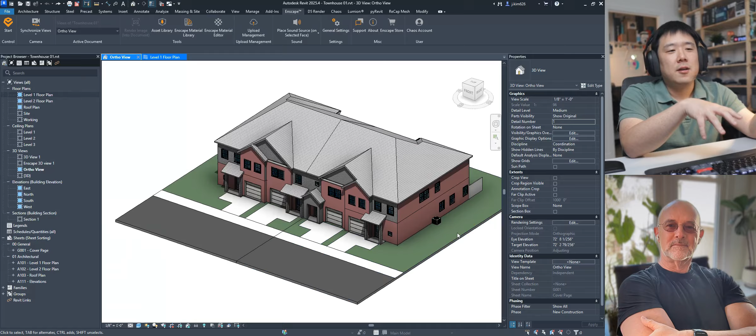What else is your plugin automating? Well, at a basic level, it's automating only the download and import part. So method one is basically bringing things in at a project level. And we have created this add-in on the Revit side. What's it called? Well, I guess 3D Warehouse Importer. There you go. 3D Warehouse Importer, it will come in as an icon inside of the add-in ribbon on the Revit side, and it gives you a single button. It just opens up a dialog.

Let me make this a little bit smaller so you can see. So it's just opening in context. So instead of going here and going there, you're opening in context. Normally you could obviously go onto your browser and log into the 3D Warehouse. For those of you who do not know, 3D Warehouse is a vast library on the SketchUp side, user contributed, and also company and SketchUp themselves contributed, of different types of assets. You can find it all here. Yes, you're going to find the right ones, but you will also find the wrong ones too. But obviously you can sort things out, but these are on the SketchUp side where visualization has more focus.

And I have been utilizing this library for a long time. It is freely available. I believe, as somebody who has an account, you have a limited amount of assets that you can download. But chances are that your office has some SketchUp license, which will allow you to download as many as you want. So I wanted this environment to be inside of Revit rather than you going onto your own browser. Yes, you can absolutely do that and search up the assets you want, but the reason I wanted this inside of Revit is because I wanted Revit and this add-in to control the download and the import part automatically.

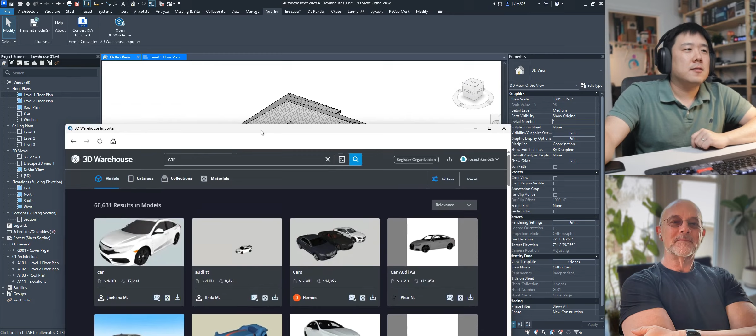So this one will keep you logged in. As you can see, as I just opened it up, it had me logged in. That was the number one thing. I did not want to log in every single time I open up this add-in. Essentially it is a browser. You can search up something. So here I'm going to look for a car, because I'm going to try to find something to sprinkle around the building, trees, cars, and context buildings, those types of things you might look for immediately when it comes to project-level asset placement.

So here I'm going to perhaps download this car here. Some top tips: when you're looking for these types of things, you want to look for cars that are not high in terms of storage. So here is 500 kilobytes, whereas this is 9 megabytes. You probably don't want too many assets that just explode your model size.

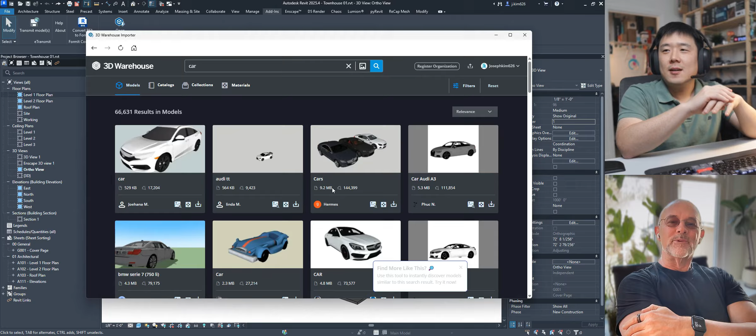So you want to be a little bit mindful of what kind of things that you bring in, but obviously you don't want to bring in like a toy car or something that is not really suitable for your scene.

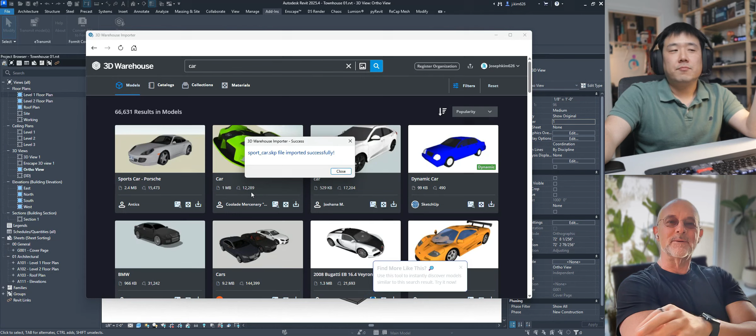Obviously I haven't done this search at the time, because you can choose from popularity. So I can go ahead and bring this Porsche, sports car, and just click on download. And here you'll simply do a SketchUp file, which is the format that you want, a SketchUp file. And this is what this is built for.

Obviously, if you are on your separate browser, you can bring it in as whatever the file format and you can save it wherever you want. But you're going to have to archive it on your preference and then on your folder separately. But I wanted to kind of remove that process, because coming up with the correct file name and correct file location all the time, and keeping up with this plethora of different types of assets coming from all different places, is quite a difficult task.

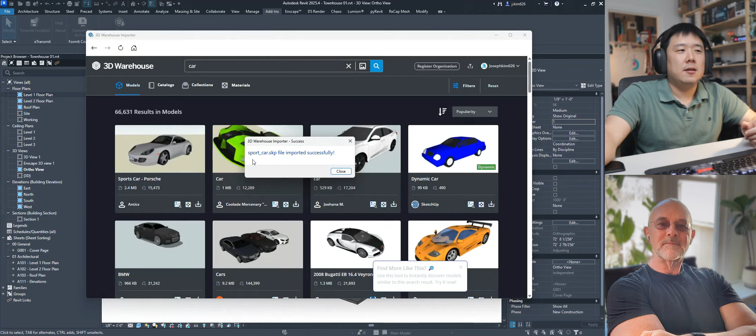So you click download and then it will internally download it and import all of that automatically for you. So here it'll prompt you: sport_car.skp, which is a SketchUp file name, imported successfully. Keep a note of this file name just in case you need to refer back later. Close, and then I can either minimize or close out. And it is in here.

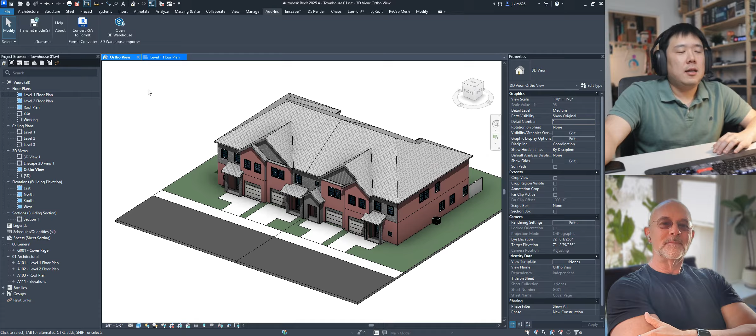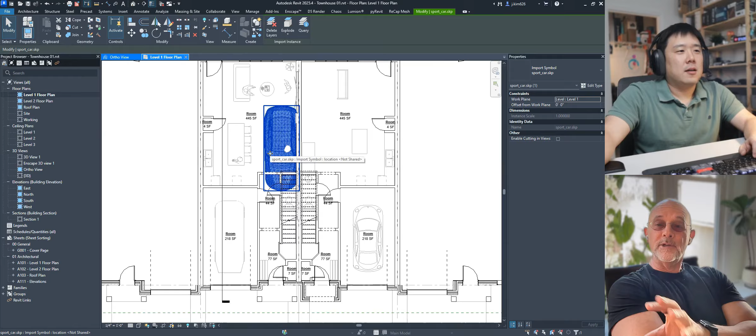Now, the first task is to look for it. How do I look for it? Usually it comes into the project base point. So my car is actually in there. You can see that there is a triangular mesh in that corner. So you can tab and eventually get to that thing, or I can also go to the floor plan and hunt my car down. It's typically placed very close to the origin of the project.

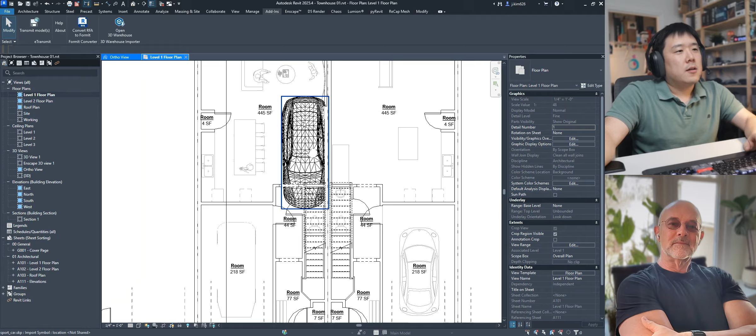Under the hood, what's happening is that it's utilizing the 0,0,0 absolute zero point on the SketchUp side and matching it with Revit's zero origin. So that's where it has come in, because you can see my project Revit origin is right there. So you just grab that, drag it out and park it in my driveway, and that car is just going to come in like that.

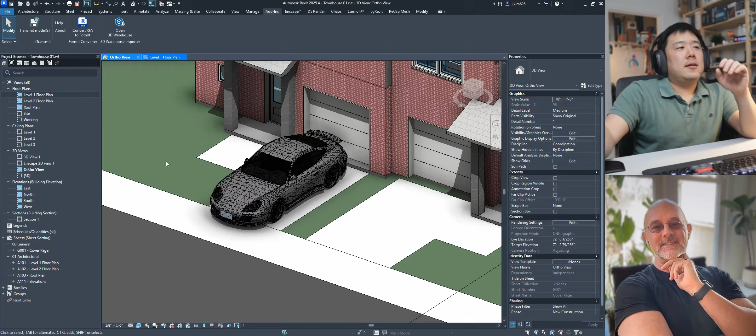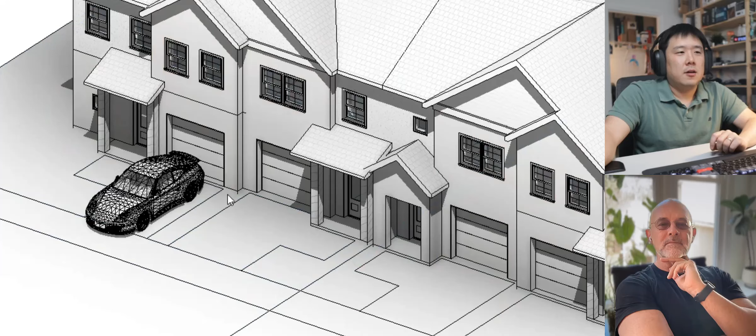And I wanted to demonstrate this. It is a triangular mesh, or triangular mess rather, so you have to be able to control that. This is mostly for quick and dirty methods, and there are methods on the Revit side to clean this up, which I will demonstrate now: graphic display options. You can click on edit here, and here I have show edges. In hidden line you would not be able to uncheck show edges, but in something like shaded, you can uncheck show edges.

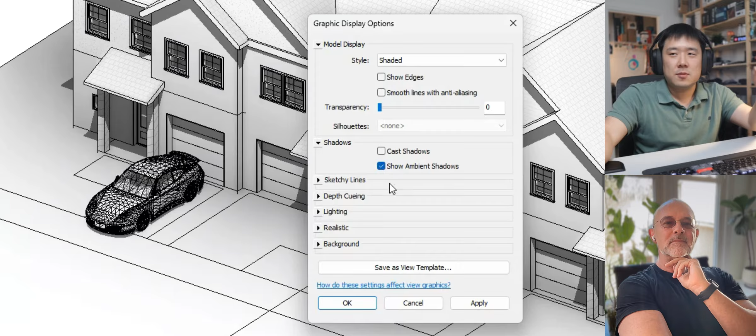What I also recommend is don't cast shadows, but do show ambient shadows, which highlights the edges of the geometry, which is ambient occlusion in visualization terms. Once you check that, it gives definition of edges where the faces meet, and the triangulation will be gone since no edges are actually shown. So you still get a suitable geometry representation with some color sprinkled throughout your 3D model.

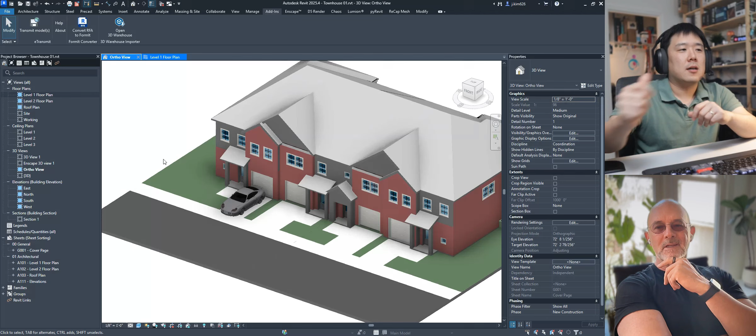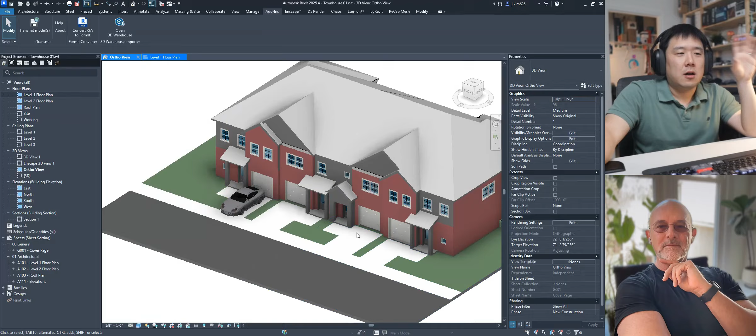And this is just a quick snapshot method to get a quick asset from the SketchUp side. Mind you, this came in as sport_car.skp, which is just an imported symbol. Essentially, what you're doing is going to CAD import and choosing SketchUp to bring something into your model. This is what I have done, but it is just done automatically. So if you were to highlight it and go to filter, it will be highlighted under the name.

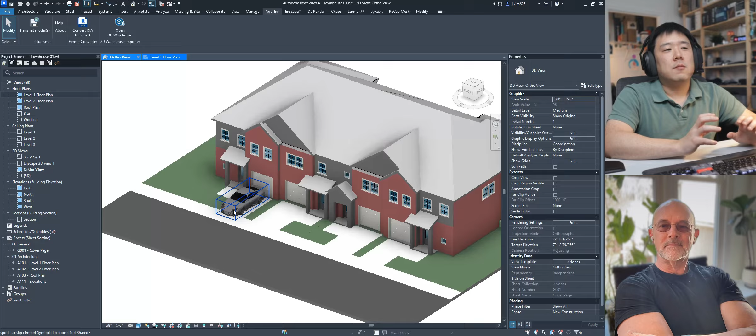Name of this thing. So it's not a family, it's just an imported asset. Sure. But this is suitable for getting a site context, especially at a larger scale if you're doing a master plan project, if you are able to find some sort of buildings, because you can absolutely search for those things, which I have done, and you can get a bunch of different types of buildings.

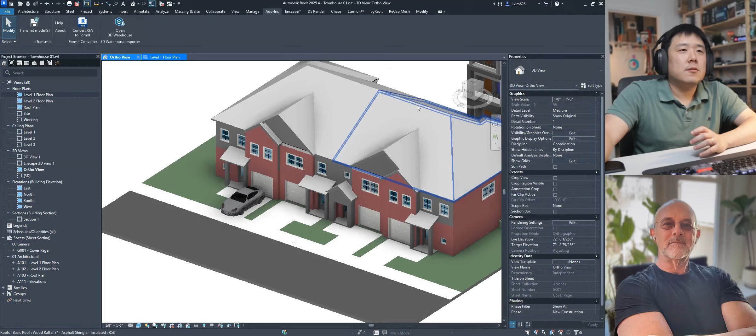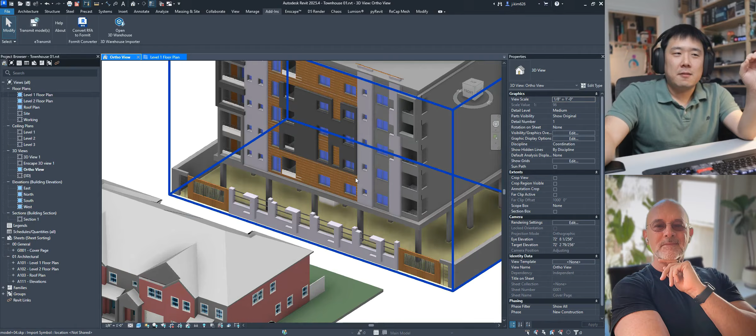Mind you, this is not big at all in terms of file size, but you can absolutely bring this in and then have it placed within your model so that they come in as your site context. Right. Okay. And if I were to bring in a Revit link or something like that, or let's say off of a website, this type of asset would have come in with a whole bunch of parameters that you don't want to play with, and that is going to mess up your model. Whereas this one just came in with just the geometry and asset and enough color representation on the SketchUp side. Therefore, placing these things around your main project will be a lot easier.

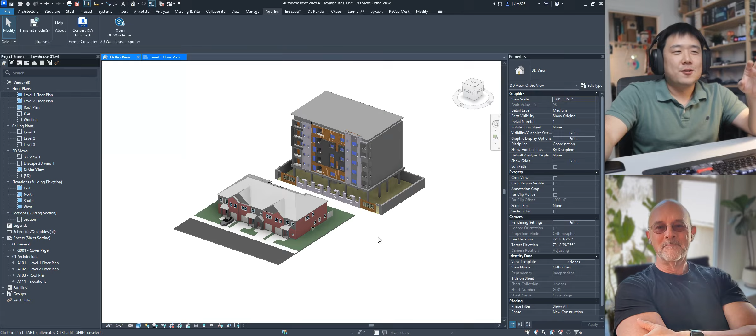Okay. All right. Like it. So that's method one, which is a project level import of this 3D Warehouse importer. It brings the elements in without all of the chaff that you don't need for context and entourage, site entourage, that sort of thing. Okay. So what's option two? So option two or method two is to bring in as a family, which is what I ultimately wanted. Method one was just a byproduct of getting there. But what I ultimately wanted was to be able to create a family quickly out of SketchUp assets and place it in my model. So I'm going to go ahead and delete this.

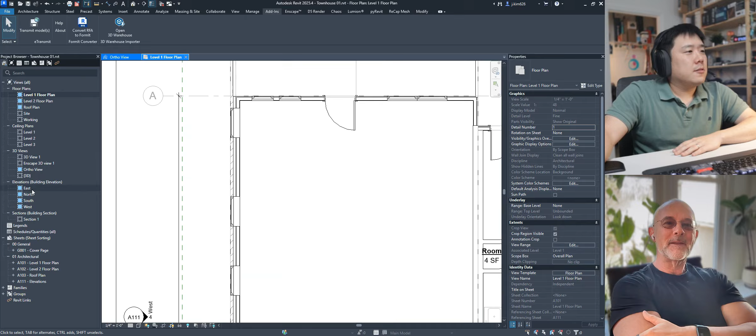Yeah, like you said, some families you don't need all the information, all the parameters, but you do need some behavior sometimes. Like if it's a wall sconce, it needs to have a relationship to a wall, or scheduling information. Absolutely. So let's say I want to populate this plan. I'm planning on this to be an open floor plan. Here's my living area, here's my kitchen. I want to be able to give that representation, or fill up this space.

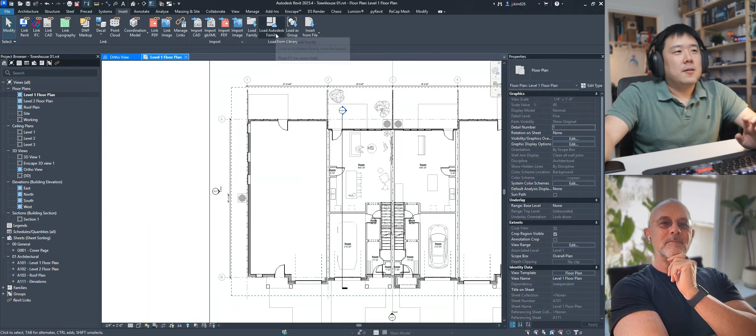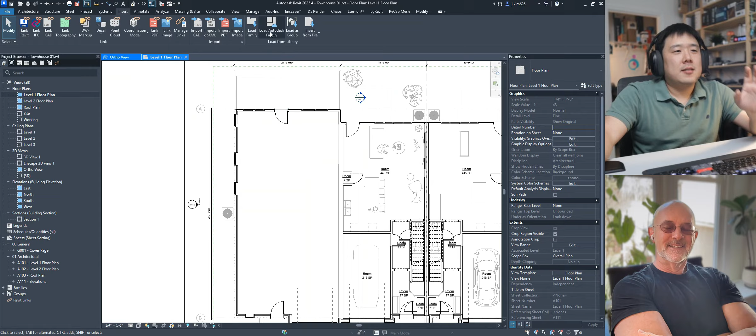Yes, you can go to Revit, Autodesk family, and look for their family, let's say desk, and download a desk that is somewhat suitable. It may not be like a residential kind of. Got it. That desk has been there for a very long time. But anyways, let's say here I want to look for a sofa. By the way, what's the difference between sofa and couch? Because I never can figure that one out.

I think the desk still comes in with the insertion point at the corner of the desk, right. And that was always here. Let's look for sofa. And they're kind of limited. Half a dozen desks or couches, and that's your placeholder. Sure. Yeah, so you can bring in the sofa, and that's fine, but you're limited to only three sofas that are available.

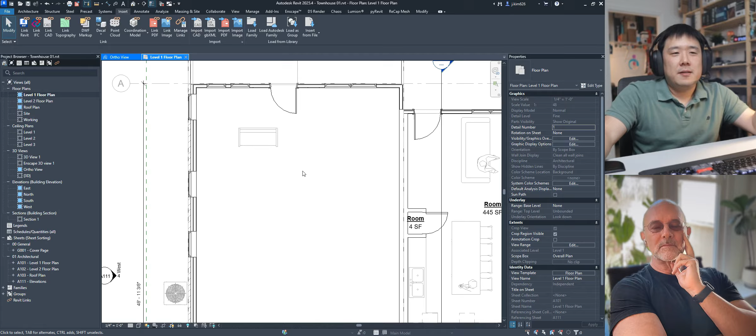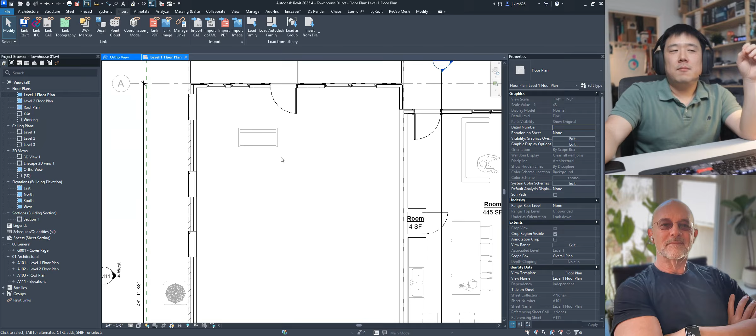Couch brings up more, and also yes, you can go to Revit City or BIM Objects or all of those library websites. But once you bring these things in, they'll have a plethora of information about manufacturer, model number, product number, and their own unique identifiers and parameters that are going to come in and mess up your schedule, which is where I'm getting at. So I wanted all of those parameters to be nuked and cleaned, but at the same time have a somewhat geometrically correct asset that is close enough for my environment.

So you can go ahead and File, New, and then here you'll do a family, just like how you would create your own family in Revit. Correct. But you're not going to model. I'm not going to model. Hopefully not. And I don't want to do that. So choosing the right template's important. If it's going to be a hosted element, wall or floor, whatever, you need to choose the correct one.

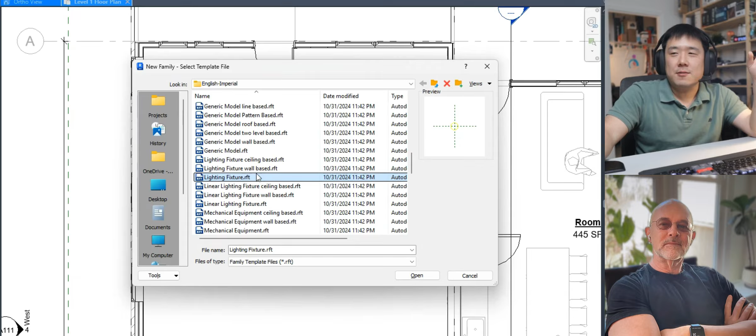Template. Yeah. Okay, well, that's easy enough. Yes, and obviously we talked a little bit on this, but for example, a lighting fixture: there's a ceiling based and there's a wall based, and also just a regular lighting fixture, but there's no face hosted, which is my preferred method. So you have to be kind of wise, and you need to know this family generating business just a little bit to be able to carry out these things. But when in doubt, obviously generic model. I don't need to host it anywhere, and then just forget about it for now, where you can then designate something later on.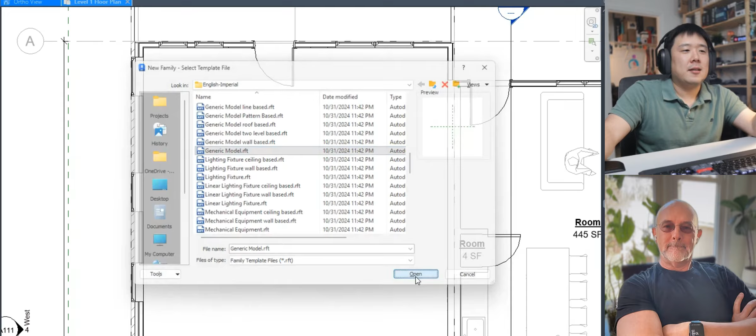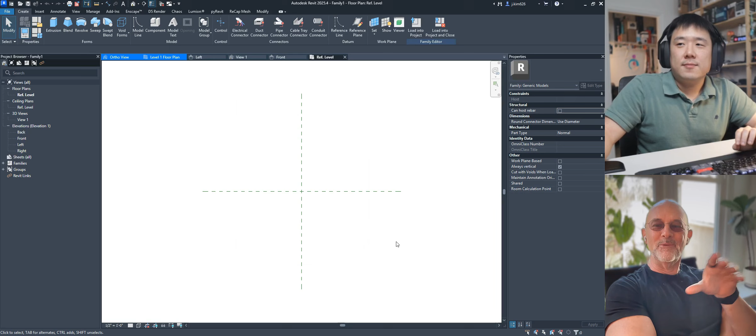So if it was a pendant, would you do generic model face hosted and then change the category over to lighting? Yeah. Because that'll give you your light source. I would have chosen face hosted. Correct. So here, then I'll flip over to lighting fixture so that it comes in as a face hosted lighting category. So if the right category is not there, don't panic. When in doubt, generic model and then change the category.

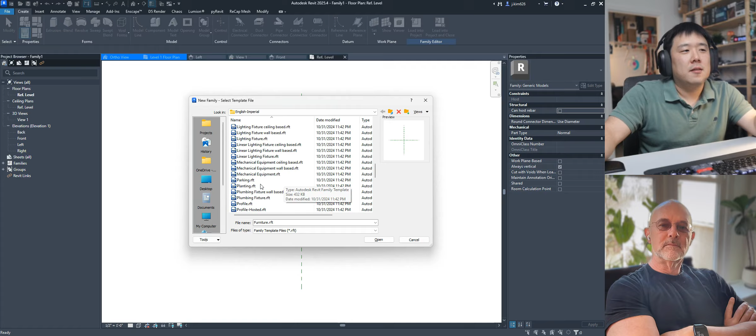Yes, and obviously, you know the category you want for your family. If you're walking in as someone who's not aware of every single characteristic of all of these categories, then I would just go as a generic model. But obviously, you can choose something like furniture, which will still be suitable. It's just that it doesn't offer as many options because it's just furniture, and for furniture there's no face hosted. Right. Because it could be a lighting fixture, it could be actual furniture, it could be any number of things. So I start off as a generic family and then move to the right one, if necessary, the one that you need.

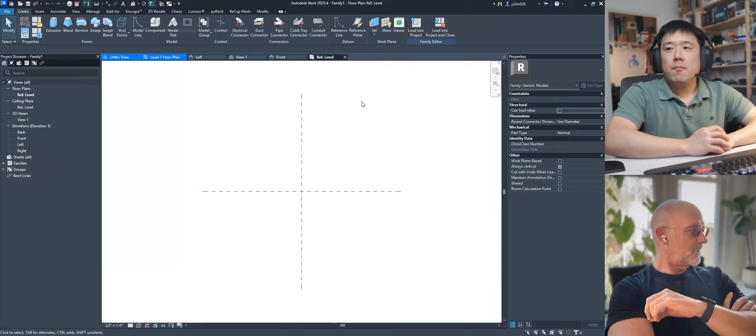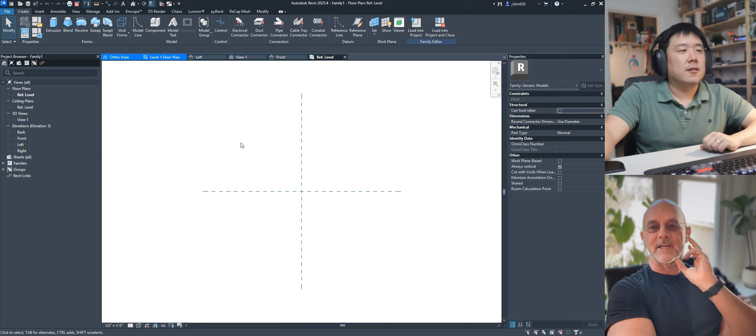Because, I don't know if a lot of people know this, but the category of the family controls how it's going to schedule automatically. So you're thinking about, is it going to have a relationship to geometry, like being hosted or non-hosted? And then what is the category? Because how do you want it to schedule? So now, is this still a generic model or have you switched it to furniture? No, it still is a generic model. I haven't touched anything in terms of the settings. And this is not a hosted generic model. We're just looking at a regular model for now. Got it. Okay. Good.

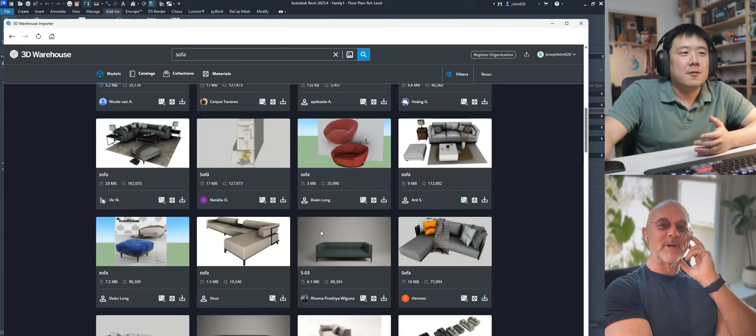And then we're gonna go to the same dialog, add in, and then open this dialog here. So here we're gonna look for a sofa. Why not a couch? You can, because I can't tell the difference. And it's got millions of sofas. Obviously, you want to be mindful of file size and polygon count when you bring these things in, and SketchUp does present their created assets on the top, and also you can choose the sorting if you'd like. I wanted to use this as an example because it has the right things in the right place that I want to talk about.

So this one is what's called a dynamic component, and it allows you to reconfigure on the SketchUp side. But unfortunately, as we're not on SketchUp, we wouldn't be able to configure it the way it's describing. It'll just take the basic form, which is what's shown on the thumbnail for now. And you can obviously go in there and change it on the SketchUp side later on. But what I'm trying to do here is cut down the time of importing, downloading and archiving, that sort of process. So you search for the thing you want, highlight it and click on download, and then it's just going to download.

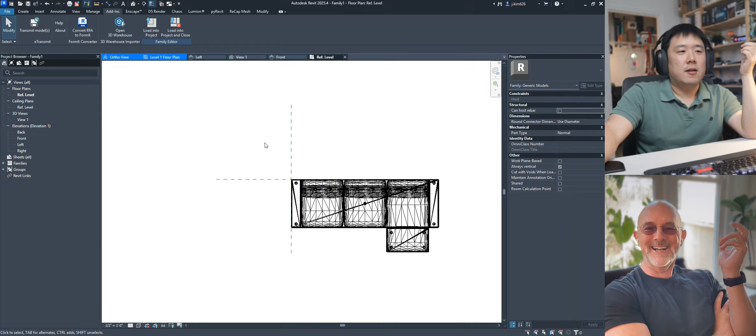So the thumbnail is the default condition. Correct. Okay, so here it did it, like poof. I'm just going to close out again. I don't need to. Yeah, it's at the origin again. It's found the right place. Again, it's a triangular mesh, or mess, however you want to call it, and it's just going to come in.

Just like how the thumbnail was showing, if I go to the shaded view, it still has the color. Which is a good part, because when you're trying to fill out your space, you don't necessarily need all the reflection values or emissivity. You just need a correct color representation of what's going on. You may not like the color specifically, but the color is still there, not some weird color being represented.

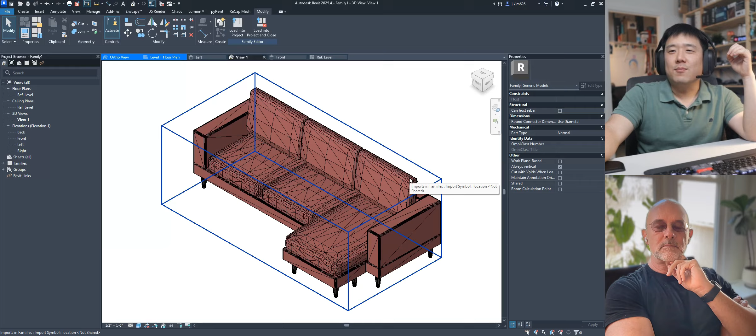Often, if you do a CAD import, it comes in as a completely different color for material code or area specific, like a layer-designated color. So it comes in blue, green, all mixed up, and none of that is happening here. It comes in like this instead.

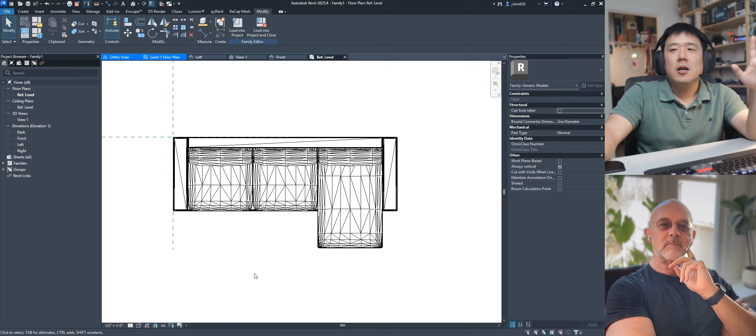You also want to be mindful of how it's going to show on your plan view, which is the hidden line rather than the wireframe, which is a different representation as a default on the family creation part. It always shows as a wired view, which is different from what you'd typically show on the plan view. So I immediately switch over to hidden line to have a correct representation of what I'm going to see on my project once I bring this family in.

You don't want to see this in your project. You don't want to see all these lines. So we're going to address that.

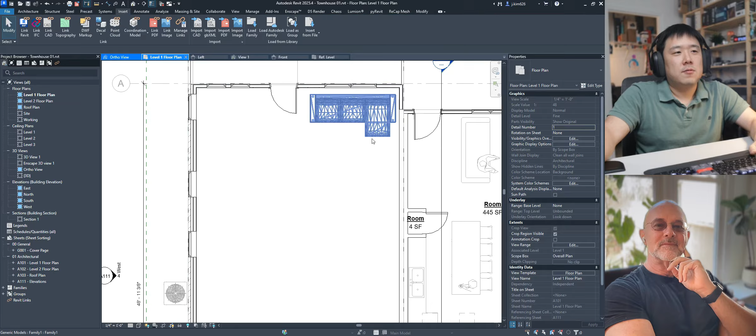Okay, so here's a bit of a manual process. Obviously you can bring this in, so I'm going to load it into my project and bring it into this corner here. It's going to come in and show the way we were seeing it. If I go to this 3D view, the sofa does exist here, and if I remove the edges, the representation is fine.

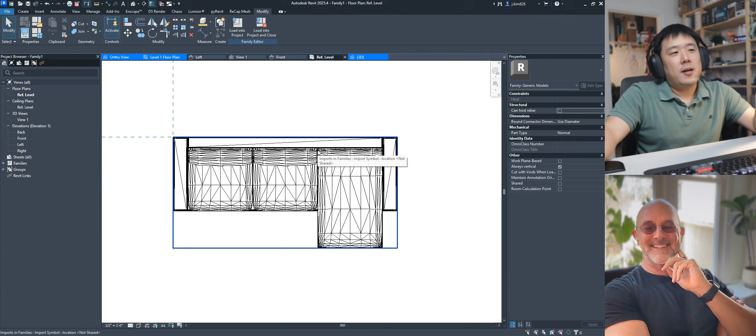But on the plan view, it's a bit of a mess because of this triangulation that's happening. So go back to your family. If you had already imported it, you might want to highlight it and do edit family to go into the family. Then you want to do the graphical representation of this, which you go to annotate and then symbolic line.

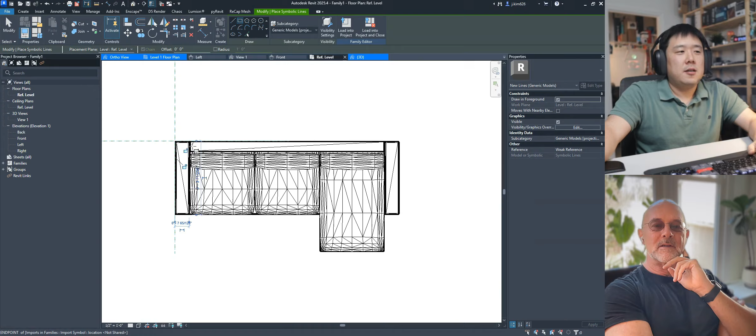Then here I'm just going to do a rectangle, and you can do it however you want. If you want to do an overall rectangle and give it a size, that's absolutely fine. But I think the better suitable representation is to trace all of these rectangles and clean it up a little bit so the plan view is nice and clean.

I don't have to line up everything correctly. I'm just trying to get some sort of graphical representation rather than trying to be very precise. We're not building the couch, we're not dimensioning the cushions. And it prompted me a whole bunch of times that my edges are overlapping and whatnot.

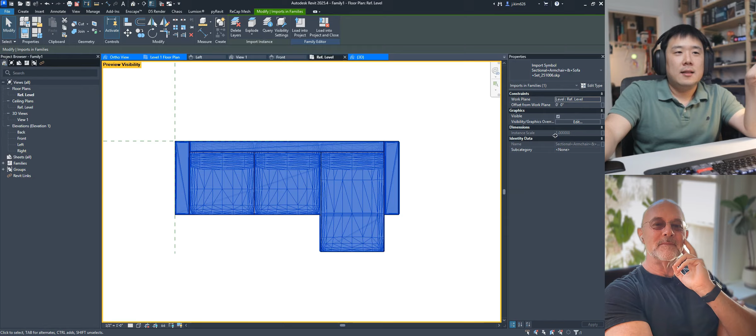And here I'm going to turn preview visibility on, then I'm just going to highlight the geometry itself and go to visibility graphics override and uncheck plan and RCP, because I don't want to see that. There you go, nice and clean. It's the geometry, or rather the lines, represented on your plan, and that's fine.

I'm going to turn preview visibility off, and then import that into my project again and overwrite the parameters. And there you go, it just cleaned up nicely. We took some time talking, but that could have taken a lot shorter than what you'd spend otherwise.

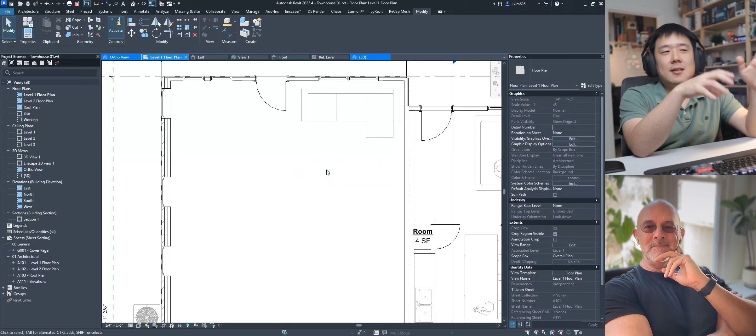In terms of browsing on your browser, downloading it, saving somewhere on the folder, coming up with a unique name for a file, then starting your family, importing that in, dragging it into the right position—none of that had to happen. You just open up something and plunk that in, and that's going to come in.

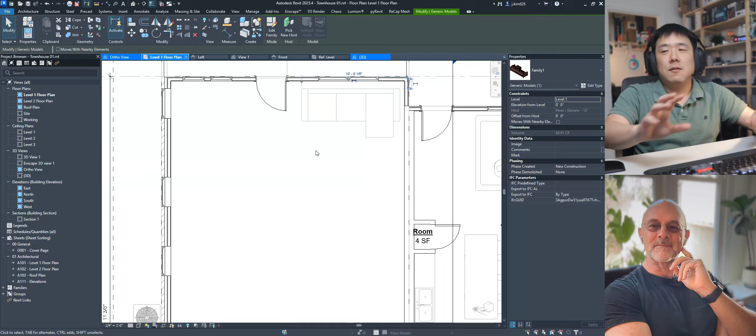Obviously, the 3D geometry is exactly the same, but you can have control. Now, those of you who are a bit more familiar with the family generating environment can set different things for your front, left, right views, and set it differently. You can add more complexity to your representation if you'd like.

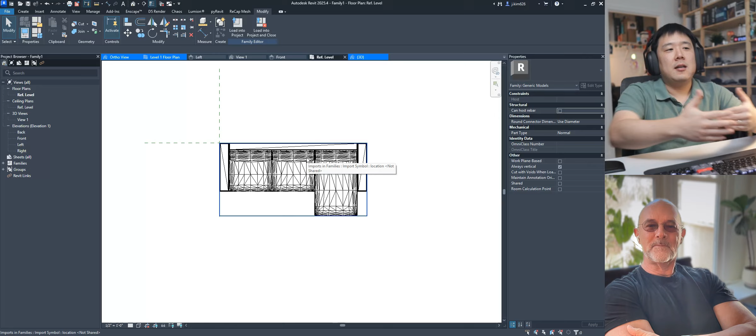If you need it simplified further, you can do a simple rectangle, however you like. This is also useful if you want to host it on a surface, or add a parameter so you can control how deep the sofa is or how far it is from a wall. For example, like a wall sconce, you can host it on a wall so it's snapped onto the reference planes, following the thickness of a face of a wall. You can also assign those things on top of this as well.

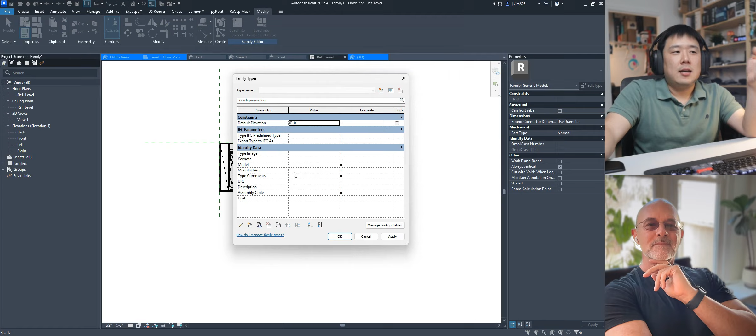And obviously, you can fill out your identity data, as you might for manufacturer or URL if you really need it, for later scheduling purposes.

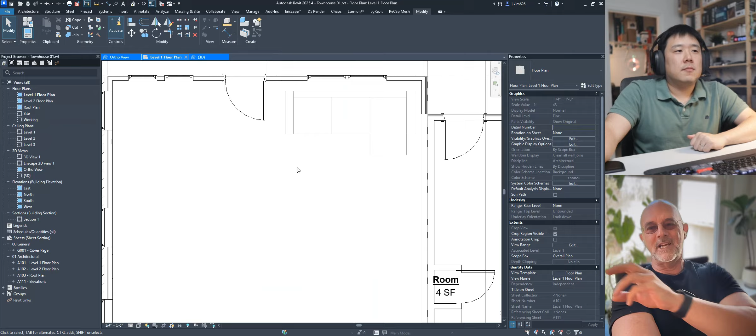So in a nutshell, this is method two, where it allows you a bit more control because you have imported this as a family rather than a project environment, in one clean move, as opposed to downloading it to the computer, opening the family editor, then importing it to the family editor. It's all right there.

That process you can absolutely do without this add-in. You can go to SketchUp 3D Warehouse and download all of that. But all I'm trying to do is cut down that time.

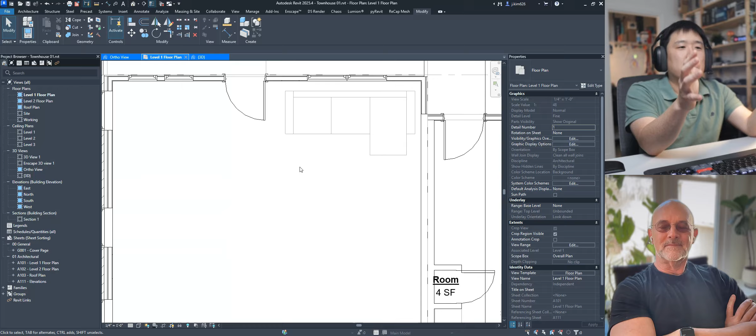Obviously, this add-in can be developed further to even automate some of these processes, like tracing things. But what I wanted to do is cut down those manual processes in terms of folder and file saving, archiving, management, and importing, down to an automation that's freely available.

I just didn't want this to be a paid app, so that if people want to download this and use it -- I'll leave the link in the description for that.

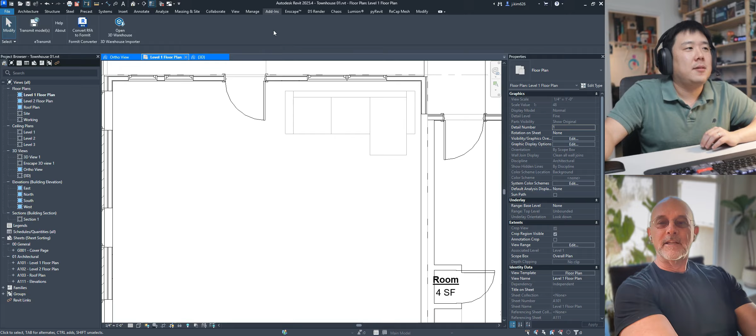It is available, and you can search on Autodesk for Open 3D Warehouse. 3D Warehouse Importer is the official name of this.

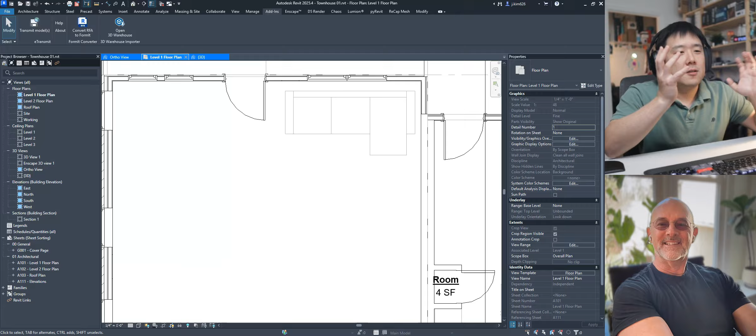Does it say anything by Joseph Kim or something like that? Can we search Joseph Kim? It is developed by Mindsight Studios, which is the company I collaborated with to develop this. So they're the ones who developed this, but we made it together as a collaboration.

Perfect. And if people have -- because architects are going to have, oh, I wish it did this, I wish it did that -- can they leave comments inside of this? On this webpage, or should they leave comments in the description of the video as people are watching? Where would you like questions or comments to come? I mean, you can obviously do it here if you feel compelled to, good, good, good praises.

But there is also a YouTube video linked on this 3D Warehouse Importer, and they could go to the video there and leave comments in the video thread. And I'll be monitoring both sides to collect feedback.

Perhaps a certain feature, if you feel this specific implementation or method is just not quite right, or something you would like more of, I would love to hear about it. Obviously, this is a first pass of a version, and I felt it was doing everything I wanted it to do, so it's absolutely fine for my purpose. But obviously people have different thoughts and voices, and hopefully this opens up the door to the vast library of 3D Warehouse.

Yes, it is still possible manually. It's just that this cuts time in terms of the processes and the efforts that you have to put in.